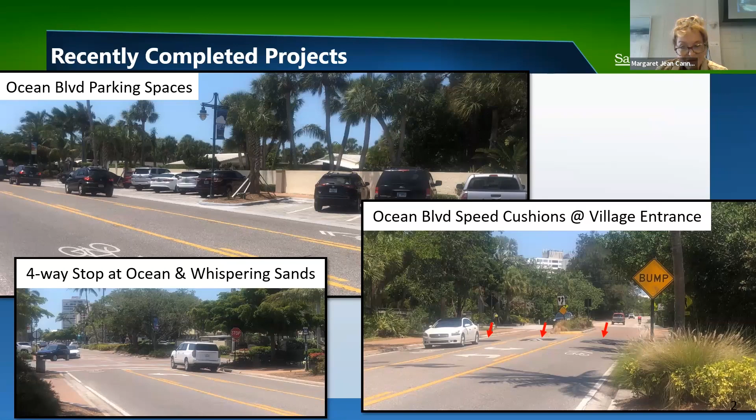So I'm sure you're all pretty familiar with that. We're actually working on a code revision - we have a program in county code dealing with traffic calming, and we're going to revise that to start allowing a more broad use of these types of devices.

So a couple other ones - the parking lot down at Midnight Pass where the old sheriff's office used to be, south of Stickney Point Road. We upgraded that and took that old building down, put a pervious parking lot in there. There was already some paved areas, but all the new parking was pervious, so it didn't require any additional stormwater treatment. And we've actually leased that out to the Chamber of Commerce.

So what they're doing is selling those parking spots or renting them to individual businesses. We do recoup some money from the Chamber of Commerce through an annual lease we have with them, and it's working out very well. They're taking good care of the lot, haven't had any complaints about noise or anything to that effect, and that's been a big plus for the condo just to the south of them. So that's worked out pretty well. Late last year, we finished the drainage project there at Ocean, Higel, and Lotus.

That was a big improvement. You really wouldn't notice it if you drive by, but if you're familiar with the area, there was a large ditch along the side of the road on Ocean and Higel, and that's been mostly filled in.

There's a pipe there now with some inlets, and it does have a small swale over top, but much safer for travelers. In addition to allowing an outfall, Banyan Road, just on the other side of Out-of-Door Academy, had significant flooding, and that small lake called Lake Nancy didn't have an outfall. So when it rained a lot, they'd get feet of water up on that roadway. This project was primarily designed to help with drainage from that area into the Grand Canal, and at the end we have a drainage structure that helps clean the water before it goes out into the Grand Canal.

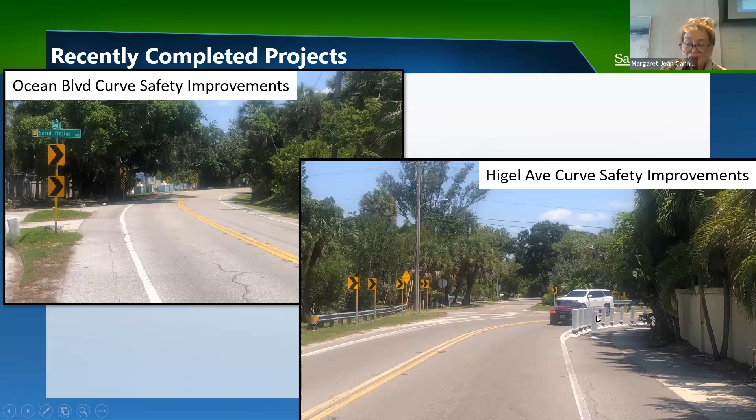One thing I did notice, generally when those are up they have what are called chevrons on them, directional indicators that direct traffic to one side or the other. Sometimes they're yellow with black chevrons on them, so that may be something we can put out there. I don't know, but it's really bad traveling it as a bike rider.

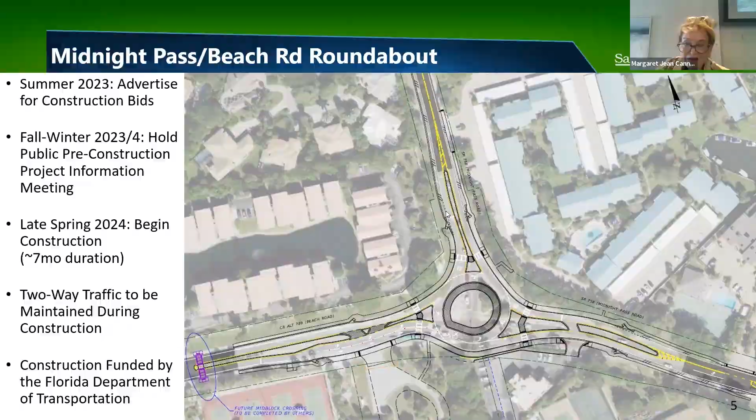We heard from this group, I think I've talked to this group, this is probably the third time specifically with this group when we've talked about this project. And heard a lot of input on how are we gonna improve safety for pedestrians and bicyclists, right? That's a big focus of all of that intersection. There's a lot of pedestrian movements and bicyclists and dealing with traffic congestion when that occurs out there. So a lot of things that we focused on with this project to deal with that.

For one, the difference between a signalized intersection and a roundabout is you reduce the specific points of conflict where you can have a vehicle to vehicle or vehicle to pedestrian interaction, right? So a roundabout naturally reduces those numbers of conflict points, which are called conflict points.

Second is at each of the crosswalks, you'll see that we have designed the flashing beacons like you see up and down on Beach Road. There's about 2 or 3 of them. So each of the crosswalks will have those.

The crosswalks, instead of having to go across the entire roadway at one time, we put splitter islands in between each lane. So if you can't get across the entire 2 lanes, you can make it to the center of that splitter island as a refuge until the traffic clears there. All of the crosswalks will be signed and marked appropriately with paint, in addition to the bike ramps.

So you talk about bikes. The preferred route for a bicyclist when you go into a roundabout is to depart the travel lane or a bicycle lane and get onto the sidewalks. So the sidewalks are all going to be 10 foot wide. The ones that are out there now are probably 4 to 5 feet wide, 5 if we're lucky. All of the sidewalks around the perimeter and exiting the roundabout will all be 10 feet wide.

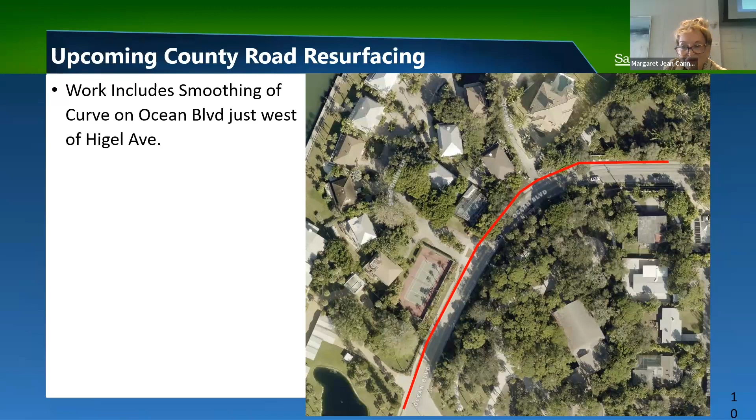The last slide—I did get some information from the DOT on their project. They've got about 90% of their sidewalk work done, and they've done most of the structural asphalt, some on Beach Road up to Shadow Lawn way. They're now working on Midnight Pass Road, and that's all being done at night. I think they've done a pretty good job with public outreach, and while there is some noise at night if you're in the area, it's much better than doing the paving during the day.

Yes, I think that's it. So now we need any questions. I have one over here. The lady in front—okay, I'll get you next.

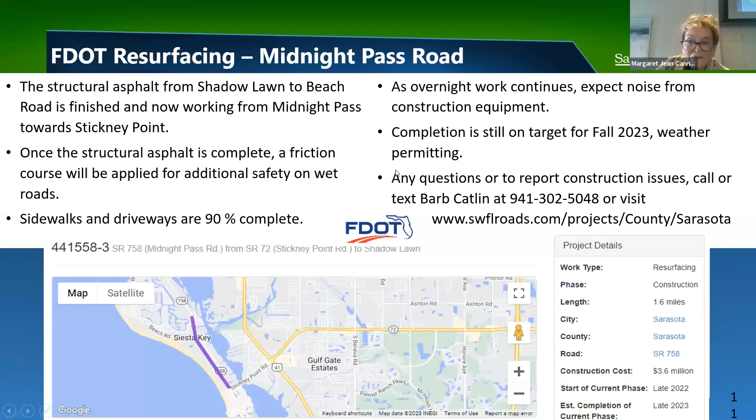Are you considering repaving Siesta Drive? It's so lumpy. I think that's on the map—it's in the city, but it's a county road now. We inherited that from the state, which I'm really happy about. So it is our road, a county road within the city. We love our city partners, but we really need help on that road. I don't see it on the map, but I can confirm that.

You recently put in a new storm drain by Captain Curt's, and traffic was backed up to Turtle Beach, from Stickney Point Road to Turtle Beach. This was around Stickney Point Road, right around Captain Curt's, where you're putting in a storm drain. Traffic backed up all the way to Turtle Beach, and doctor's appointments had to be canceled in our household. Okay, that may be part of the resurfacing project—I'm not aware of the county doing anything there. We asked them, my daughter did, what are you doing, and they said they're supposed to be putting in another one right now but could stop, because people can't breathe around there. Yeah, that sounds like a good alternative.

Yeah, I'll contact the state folks and bring that to their attention. Obviously they heard about it pretty quickly since they called off the other one they were planning on doing. Might have been people's claims.

I'm just suggesting, I think it would greatly help the flow of traffic on the highway. People get behind those trolleys and you have to go inch by inch when they stop, letting everybody off, then back on, then inching along. Now, they could easily make some kind of cut-out so you can go to the right or left, let the people off, let them back on, and let the normal flow of traffic go at a normal pace.

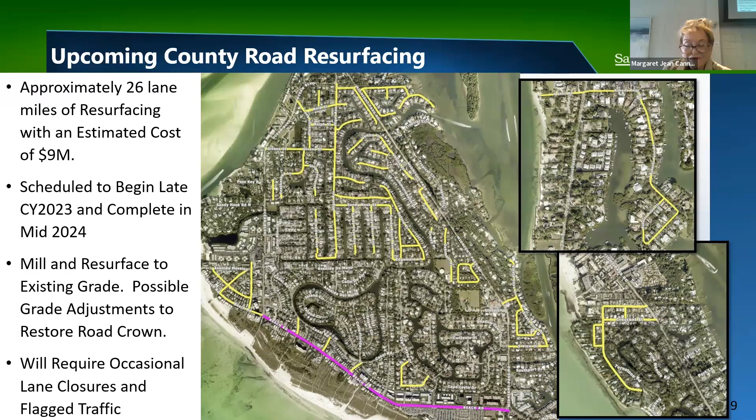Four months you can't get out of there. You're supposed to go, let's say, for 20 minutes, and you have to take 40 or 60 minutes to get to where you're going. That's not right, that's not fair to the inhabitants of the Key. That's another issue - the trolley with the county and the bus service is another issue. I think it interfaces with what you do, but that's a whole other area. It is our transit department's issue, and Jane Grogan is the director of that, but I'll talk to her and see if we can get some feedback.

Just wanted to ask - I come out on Midnight Pass quite a bit to go to the South Bridge. Did you say on the roundabout there's going to be a designated lane for us to take a left, because during season we're never going to be able to get into that roundabout with all the cars coming to the beach? On South Beach, Southbridge, there will be one exiting the roundabout, but entering it there won't. So everybody could just block us, and it'll back up because people waiting are hurrying to get a parking space for the beach, and we're trying to get over to the South Bridge. How are we going to get around?

Okay, yeah, I hear you, and if that really becomes a problem, something Mr. Holder has brought up - like a signal that can temporarily queue traffic behind it to allow that to be open - is something we could look at in the future if that does become a problem.

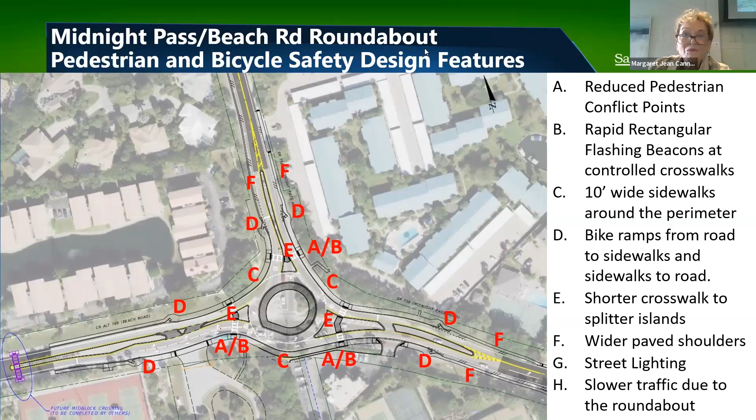Well, thank you. This presentation is available on our website. You can come back and see some of these photos and think about what you learned. It'll still be in place, so when you start to see some things happening, it won't be hopefully quite as frightening. But some things will be happening, and I'm hoping that wherever you are, you find that after all the trouble, it is well worth it.

I have to say that unfortunately we are now missing Nancy Dieter, but I was at a commission meeting a couple months ago when she was hearing more about roundabouts, and she said, 'Is there a problem there? We've had a lot of accidents.' And they said, 'Well, no.' And she said, 'I just don't want to have to undo these things after we get them in because we are having accidents.' So I just want you to know we've all learned and heard that from her, and we're not forgetting. We'll keep a focus, our ears open, and we have a very good open dialogue that we've had for some time, and we will continue to have it.